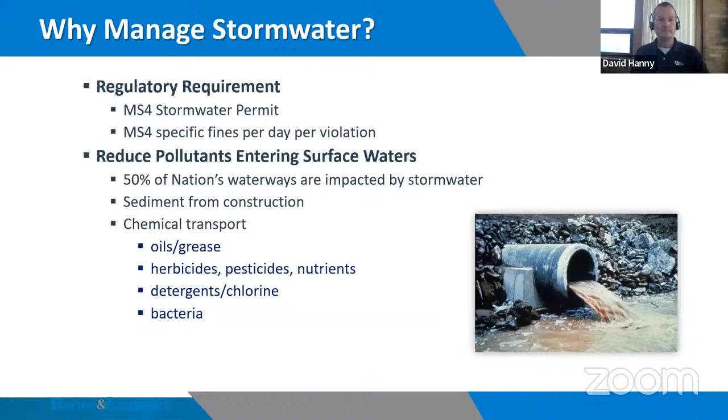So what I'm going to do over the course of the next 45 minutes or so is to give an overview of the MS4 permit and really focus on what's required today and how that's going to change once the draft MS4 permit is adopted. So we'll go over some of the current requirements and some of the new requirements that are going to affect

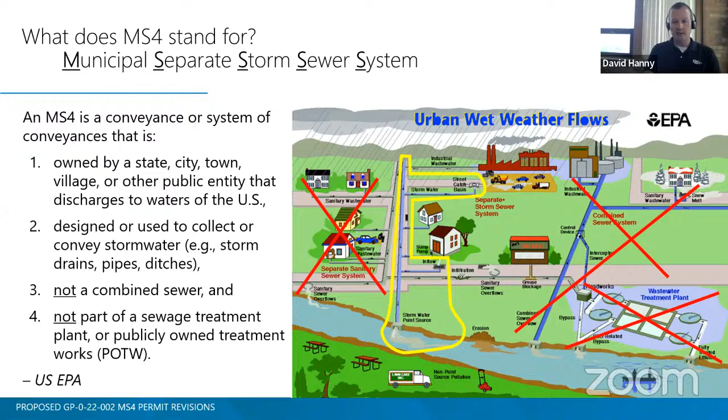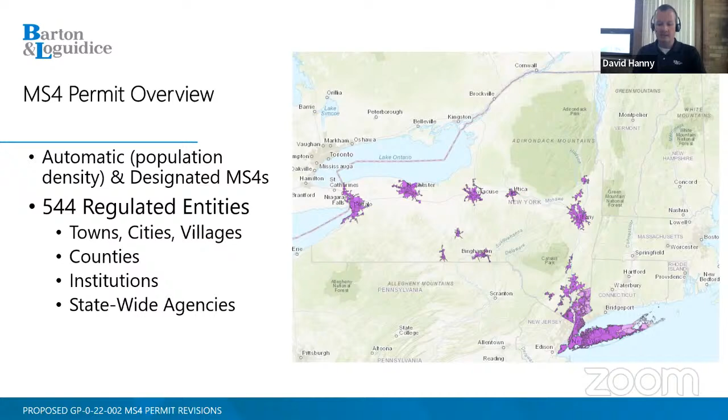So the MS4 permit covers urbanized areas throughout New York State. You can see the purple areas that it covers. So these are all the MS4 areas in New York State. There is one more in Watertown. This map wasn't updated yet by the DEC, but there is another urbanized area in Watertown. So all told, there are 544 regulated MS4s as of last count. They can be at the state level, county level, local level, city, towns, villages, institutions, agencies, for example, Thruway Authority or New York State Department of Transportation, that they can be regulated MS4s as well.

So focusing in on the Capital District, it covers cities, towns, villages, and the counties within Albany, Rensselaer, Saratoga, and Schenectady. So if you have any questions whether or not you are a regulated MS4, you can certainly reach out to myself or Martin, and we can confirm if the regulations apply to your municipality.

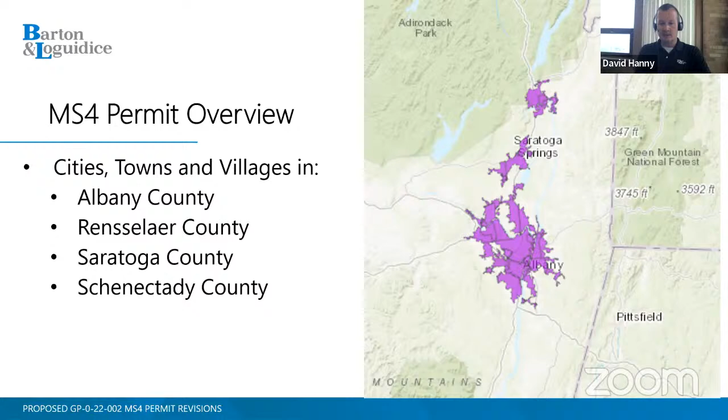So the real focus of this MS4 stormwater program is to develop a municipal stormwater management plan or municipal stormwater management program. And there's 6 key minimum control measures that go into the MS4 plan. So they include public education and outreach. So municipalities need to engage the public, educate them on the impacts of stormwater. They involve public involvement and participation. So under this control measure, we're looking to make opportunities for the public to get involved with the local stormwater program.

So every year, MS4s have to submit reports to the New York State Department of Environmental Conservation, documenting everything they've done in the past year for their stormwater program. Those reports need to be made available for public review, comment, participation. We also look to get the public involved with volunteer activities, anything from a stream cleanup to an Earth Day event. Just again, trying to get the public engaged and trying to be part of the process. The third minimum control measure is illicit discharge detection and elimination.

What that means is all the stormwater, whether it's from a pipe or a ditch, ultimately will lead to an outfall. And the outfall is the location where the stormwater discharges into a receiving water body. So part of the MS4 program is reviewing these outfalls, inspecting these outfalls to make sure that it's only stormwater

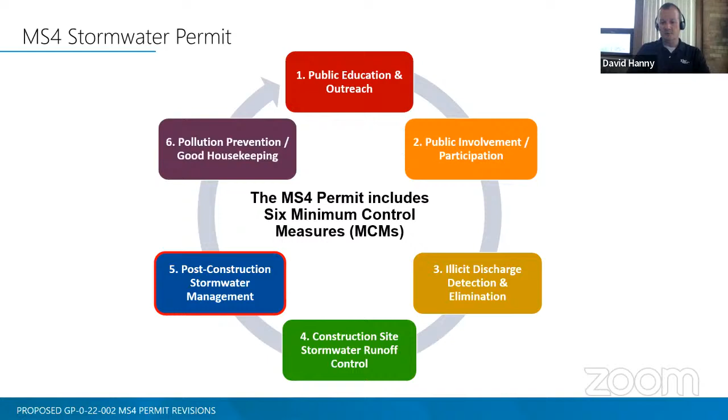And the final minimum control measure is pollution prevention and good housekeeping. Just making sure that all of the activities at municipal facilities aren't contributing potential pollutants to the stormwater system. So making sure that municipal highway garages, parks departments, have programs and policies in place so they're not negatively affecting stormwater runoff.

So it's just an overview, as Martin said in the introduction. It's been a while since we've had substantial revisions to the MS4 permit. It's been over 10 years. So we had a permit in 2010 that was challenged by environmental groups. There's been several litigations. It's been tied up in the courts for many years.

And then in 2015, we got the last MS4 permit that came out, and that's the permit that we're still adhering to today. There was a draft permit that came out in 2017, but due to the ongoing litigation, that was never finalized. So it's been several years since we've had a big update to the MS4 permit, and that's what I'm going to discuss today.

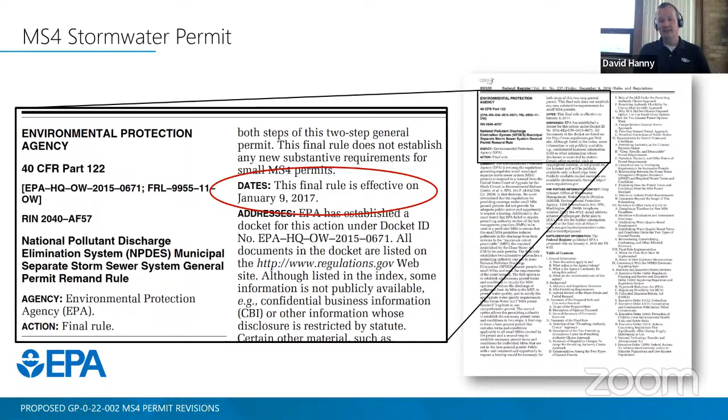So really the game changer that got us to where we are with this new draft MS4 permit at the state level was driven by a 2017 rule through the Environmental Protection Agency at the federal level, where they issued their new NPDES, their national MS4 permit. So that went into effect in 2017, and then that gets trickled down to all the states.

So I mentioned there's been ongoing litigation both at the federal level and the state level. Based on that litigation, in 2017, the US EPA issued their final Phase 2 rule. And that's kind of where we're all trying to get caught up to now in New York State.

So one of the big terms that came out of that 2017 federal rule is the maximum extent practicable. So under that, the MEP, MS4s must track information, analyze information, and adjust their stormwater management program. So it's really trying to comply with this new federal 2017 rule that has promulgated the changes to the current draft MS4 permit.

So I'm going to go through now and talk about all the changes that are going on with the draft permit. I'll preface this that if you don't like the changes, it's not me. I'm relaying the information in the regulations, and all of this is still subject to change. The draft permit was out for public review and comment.

That public review and comment period is closed. The permit was supposed to be issued in April. The effective date of the permit was listed as April 27th of this year. But it still has not yet been released.

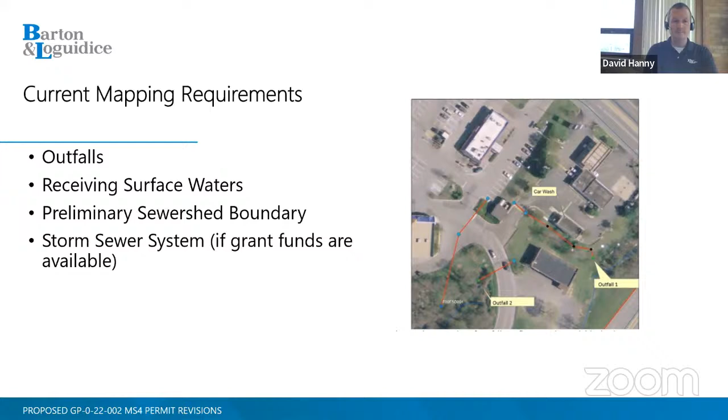As I go throughout the presentation, you're going to see a lot of references to EDP. And what that means is the effective date of the permit. So for the mapping requirements, they broke it out into 2 phases. So phase 1, within 3 years of the effective date of the permit, the MS4s are required to prioritize different monitoring locations for their outfalls, look at different focus areas. So focus area could be an area where you have heavy industrial usage, maybe a commercial corridor.

The MS4s are also required to map permanent stormwater management practices that they own. So if it's a municipally owned pond, that's required to be put on the mapping. And they're also required to identify their municipal facilities on the outfall maps. So your highway garages, your public works departments, your parks departments, all of those facilities are required to be put on the outfall map. And I'll talk more about those in a little bit.

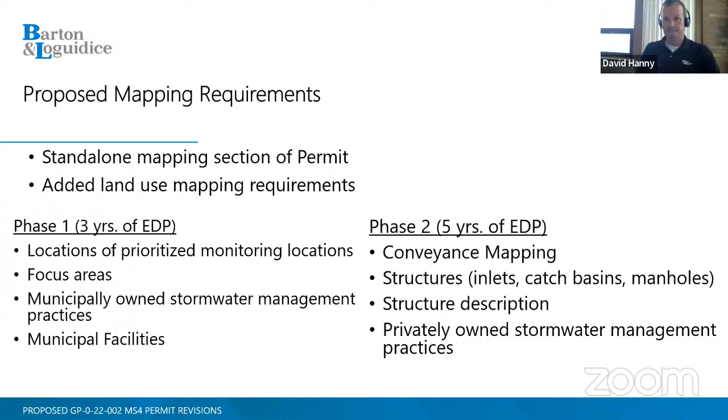Yeah, for a car wash, they would be required to discharge the process water into the sanitary system. Yes. Yep. Were there more questions up there? No, that was the only one so far.

But under the new regulations, a lot more mapping is going to be required. Again, all of the conveyances, whether it's pipe, open channel, size of those conveyances, catch basins, manholes, and even privately owned facilities and drainage structures that may not be owned by your MS4. So if you're a local MS4, a town, and if you have a county road or a state road running through your jurisdiction, you'd be required to show those locations as well.

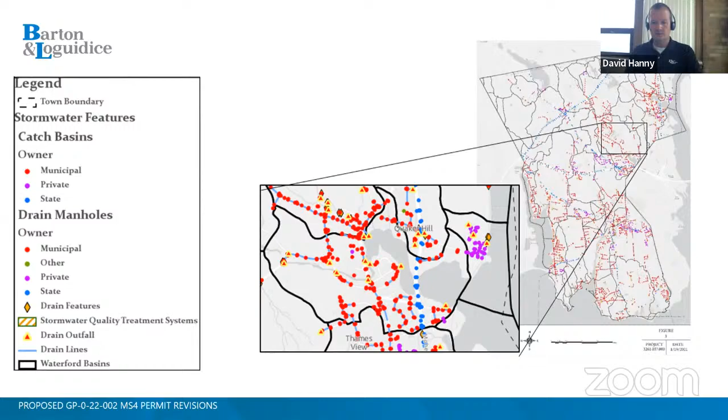Okay, so I'm going to get into minimum control measure 1 and really follow the same format. If any of you saw the DEC's webinar that they put out on the proposed changes, it follows a very similar format where I'm going to go through some of the current requirements and then the proposed new requirements. So minimum control measure 1 is public education and outreach. Under the current program, basically the MS4s are required to educate the public on pollutants, water bodies, and geographic areas of concern. And they're required to identify target audiences to educate the public.

So what was always a gray area under the current program is, how often do we do this? We can create flyers. We can put flyers or pamphlets in water bills and mail them out. We can have pamphlets at town hall or municipal buildings. But it's difficult to track, and it was difficult to gauge how often this outreach needed to occur.

So under the proposed regulations, within 3 years, the municipalities are required to identify focus areas. And these could be based on the watershed within your municipality. So some watersheds may have different impairments or different pollutants of concern. Some areas may be more prone to construction activities. Some areas may have streams that are running through them that are prone to erosion. Looking at areas that are on on-site wastewater treatment systems. So if you have an on-site wastewater treatment system, specific outreach would be required.

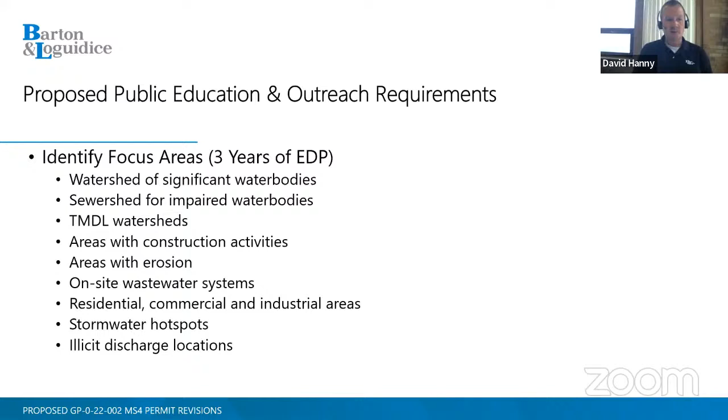Outreach is required for different residential components, commercial, industrial areas, stormwater hotspots, which could be a gas station or another type of operation that has high potential for stormwater contaminants. And also training is now required on illicit discharges. So the new program, again, requires different training for different audiences. So your training for residents is going to be different for commercial properties. It's going to be different for construction operators. It's going to be different for your municipal employees, but it really requires a much deeper, broader training to be developed. Again, I mentioned specific trainings required for illicit discharges.

And now we have a time frame. So education must be conducted to each of these different target audiences at least once per permit term. So we anticipate that it will likely be a 5-year permit. So you have to reach out, have to develop targeted information for each of these different audiences at least once during the permit.

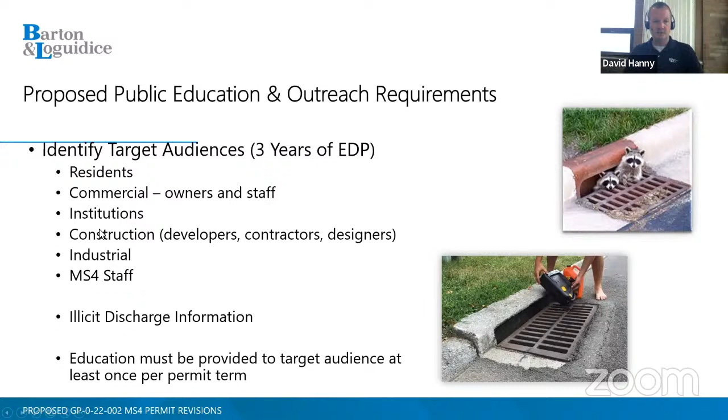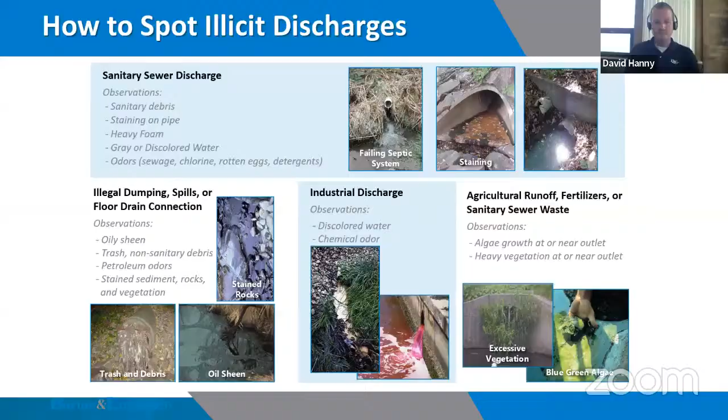All right, so we're going to jump to minimum control measure 2, public involvement and participation. Currently, there's not a whole lot required under the permit for this. Each municipality is required to have a local point of contact. So someone that the residents can call if they see a drainage issue, an erosion issue, if they see an illicit discharge. Municipalities also have to make their annual reports available for public review and comment, and the same with their stormwater management program plan. So typically the way this has been done is by postings on your municipal website.

So I just would ask everyone, if you are a regulated MS4, take a look at your website and see what information's on there. Ideally, it's going to have a link for your stormwater management program plan. It's going to have a link for all of your annual reports, hopefully some public education information, and some opportunities to get additional information as well, perhaps links to DEC websites or EPA websites.

So under the new permit, a few changes. There has to be an opportunity once a year to receive public comment on your stormwater management program. The other big change is, as most of you know, we're wrapping up the end of May here, and MS4 reports are due June 1st. I'm not sure if that reporting deadline will change under the new permit, but under the proposed permit, you have to seek public comments by May 1st of each year.

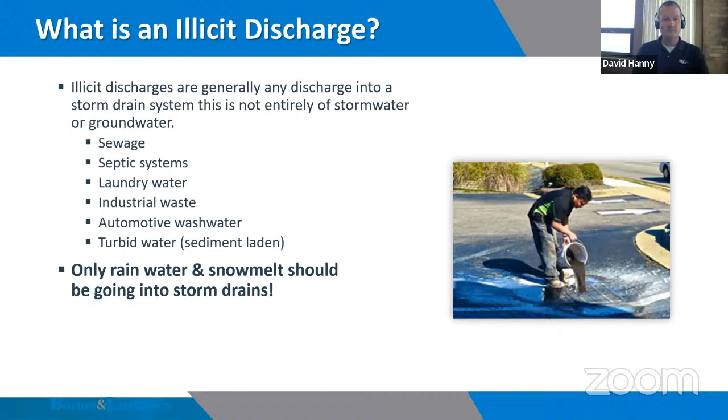So under the current program, you're required to inspect all of your outfalls at least once every 5 years. So typically you'd like to try to get 20% of your outfalls inspected each year. You also have to have a local law, assuming that you have the ability and authority to implement local laws. This isn't required at the county level. So towns, villages, cities have to have a local law that prevents illicit discharges.

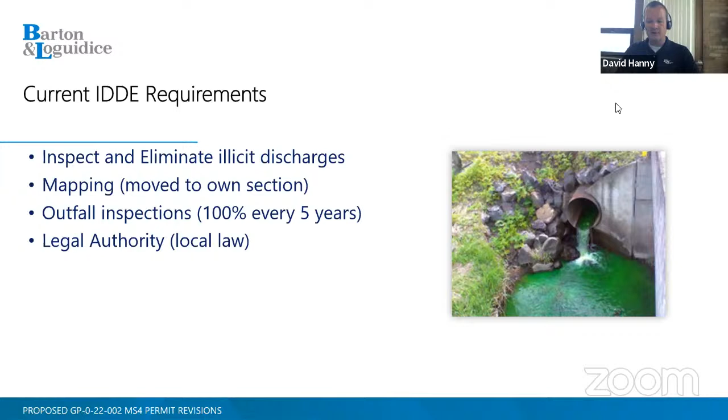So under the new requirements, you're required to map more than just the outfalls. You're required to map any connections to another MS4. You're also required to map all of the discharges from your municipal facilities to your MS4 drainage system. So just to go a little deeper on that, right now under the current permit, you would just have to map the outfall location, the location at the end of the pipe or the ditch that drains to a surface water.

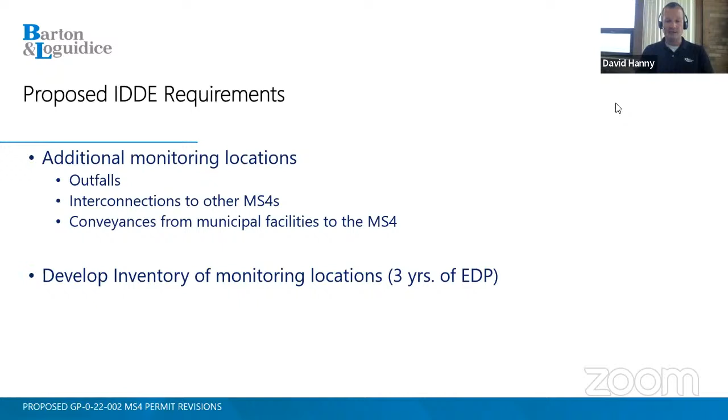But now under the new program, if you have a municipal facility, if it's a public works facility, where the drainage off that public works facility enters the rest of the drainage system, not just the outfall, those locations need to be mapped. And then based on those locations, each municipality is required to develop an inventory of monitoring locations. So it could be monitoring more than just the end of pipe. It could be monitoring those connections where your municipal operations drain into the rest of the drainage system.

So one of the keys here, you're going to see this a couple times as we move forward, are these priority rankings. So under minimum control measure 3 for the illicit discharges, you're required to rank your outfalls either as a high priority outfall or a low priority outfall. So a high priority outfall receives drainage from a high priority municipal facility, which could be any municipal facility that has petroleum bulk storage, salt storage,

does fleet fueling, does maintenance on equipment. That would be considered a high priority municipal facility. So if you have discharge from one of those facilities that goes to an outfall, that would turn that into a high priority outfall. Other ways you get into a high priority outfall is if that location discharges to an impaired water, a TMDL water, or high priority water.

So basically, if you're going to either an impaired or a very high priority clean water, that would put you in the high priority outfall status. And if there's been 3 or more citizen complaints, so again, you have to have a community hotline, you have to have a municipal point of contact. If there's been 3 or more complaints at a certain outfall location, that would automatically elevate that outfall location to a high priority point.

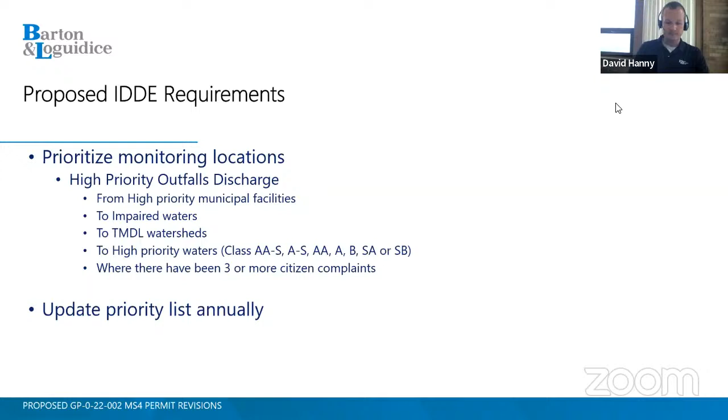So what does that mean? Under today's permit, you would have to just monitor an outfall once per permit term. But if you're a high priority outfall, those have to be monitored and inspected at least twice per permit term. The low priority outfalls stay where they are today, just once per permit term.

There's some other changes. Typically, when you do these outfall inspections by the permit, you're required to do them during dry weather. So you don't want to be doing the outfall inspections when it's raining. The purpose for that is if you're out there during dry weather and there's flow coming out of a pipe or a ditch, that could really indicate a potential illicit discharge. It could be a cross connection from a sanitary sewer. It could be a connection from a floor drain. So that's why you're required to do it during dry weather.

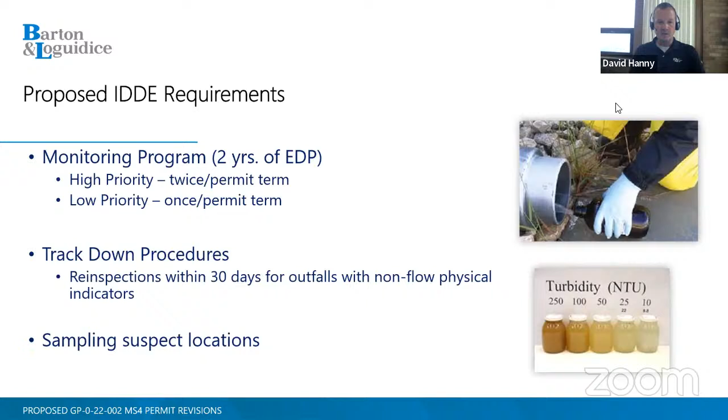So if you go to an outfall and there's no flow, but there's indicators of potential contamination at the end of pipe, you're required to re-inspect that within 30 days. So I'm just going to walk through some of the inspection requirements. These inspection forms are contained in Appendix D of the draft permit. There's a lot of good information there. But this is the type of detail that you're required to document.

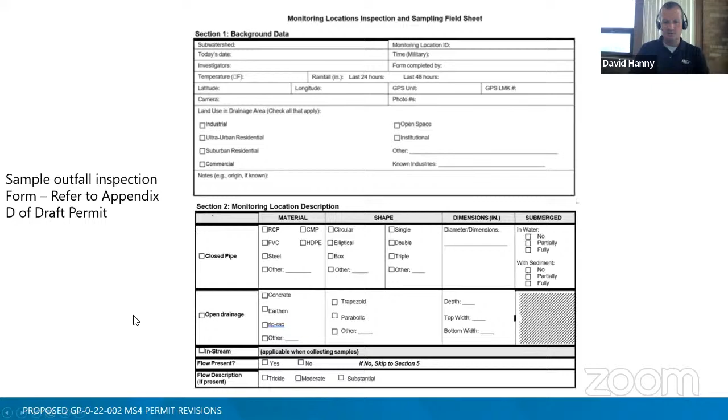So it's not just the outfall location. It's the construction of the pipe, whether it's concrete, steel, CMP, HDPE, the characteristics of the drainage swales. If there's flow coming through the pipe, you need to record that, measure that. And here's really the key for outfalls that are flowing: is there odor, color, turbidity, floatables? That could indicate an illicit discharge.

Under the new permit, for non-flowing outfalls, if you have an outfall that's not flowing, but you see damage to it, or staining or high weed growth, you're required to go back and do a reinspection within 30 days. And finally on the outfall form is a summary of whether or not you saw signs of an illicit discharge, and this could lead you into actually doing some benchmark testing for water quality.

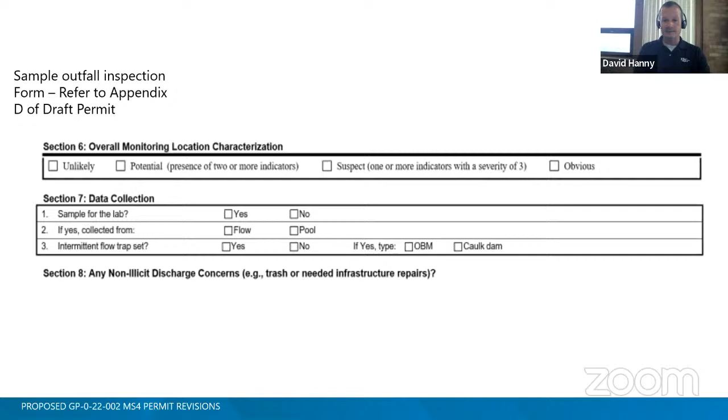Hey, David, we had a question from one of the attendees about the effectiveness of winter inspections. Do you find the communities you work with are getting good information or usable data if they're conducting winter inspections at their outfalls or their facilities for that matter?

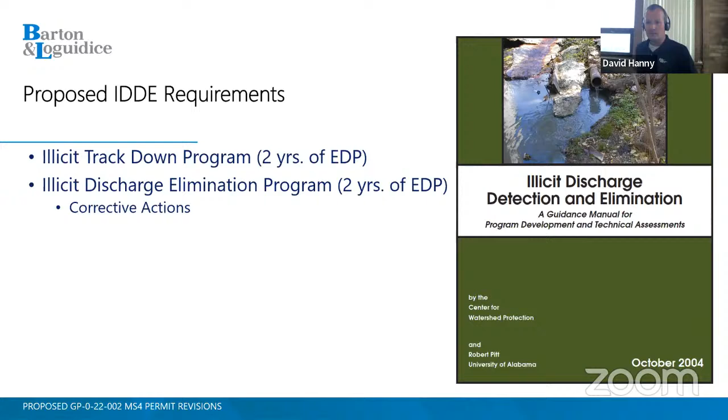Yeah, I would think less so. Typically we do our inspections either early spring or late fall. The reason is the outfalls are just easier to get to before things grow up. All these outfalls drain into a water body, so they all have excessive vegetation. It's much easier to see the discharge. So we haven't done many inspections in the winter. We typically focus on spring and fall. Thanks.

All right, we're going to shift to control measure 4. Again, this deals with runoff from construction activities. So under today's permit, MS4s must have a local law in place dealing with erosion and sediment control. They must have a process to review stormwater plans. So if a site plan comes in for your planning board review, depending on if that site disturbs over an acre, they're required to have a stormwater pollution prevention plan. So municipalities have to review and sign off on those stormwater plans.

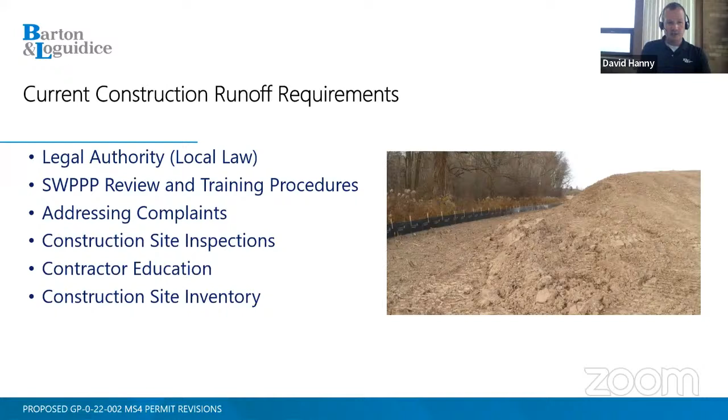There's also requirements for addressing complaints, doing construction site inspections, and that was also another real gray area. So under the current permit, the MS4 is supposed to be doing inspections of construction activities, but there was never a real strong indication of how many, the frequency, how often, when should you do these inspections. So that's changed under the new permit. There's also requirements for educating contractors and to have an inventory of construction sites within your community.

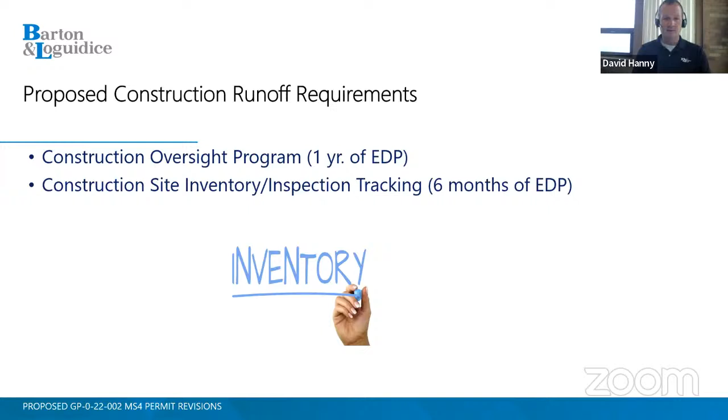So under the new program, you have to develop a comprehensive oversight program, which really outlines how you're going to oversee the construction activities within your MS4. You also have to develop a detailed site inventory and inspection tracking mechanism. So again, I mentioned the priorities, so that comes into play again here. So based on the type of construction activity in your municipality, where it's located, is going to dictate how often you have to inspect it.

So a high priority construction site is going to discharge again to a threatened water body that's on the New York State DEC's 303(d) list, or to trout spawning or trout waters. If the construction activity is close to a pond or a stream, you can see the buffer requirements there. That amps the inspection requirements up. If you're disturbing more than an acre of soil on a soil slope phase of D, E, or F, which are basically your steeper slopes, that's going to increase their frequency. And if you are disturbing 1 or more acres with a high erosion risk, that's going to increase the inspection frequency.

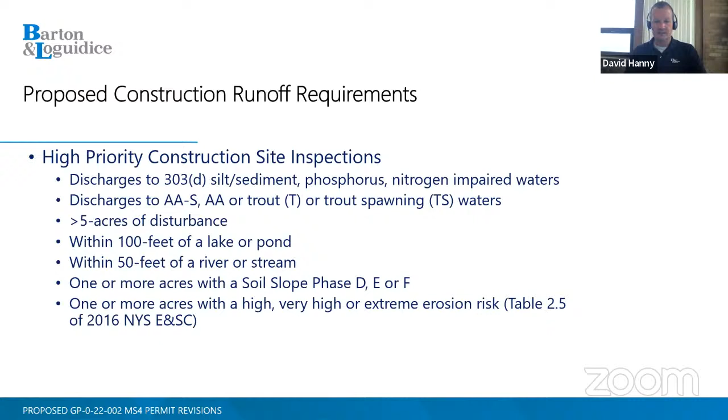So here's the requirements for a high priority construction site. The MS4 operator is required to inspect that at least once a month. So every 30 days, someone from the municipality has to go out, has to oversee the construction activities, make sure that the construction are following their stormwater plan, making sure that they're doing their weekly inspections. A lot of times, municipalities require construction site operators and inspectors to send them their reports. So typically these reports are being done once a week. If you're disturbing more than 5 acres, they have to be done twice a week.

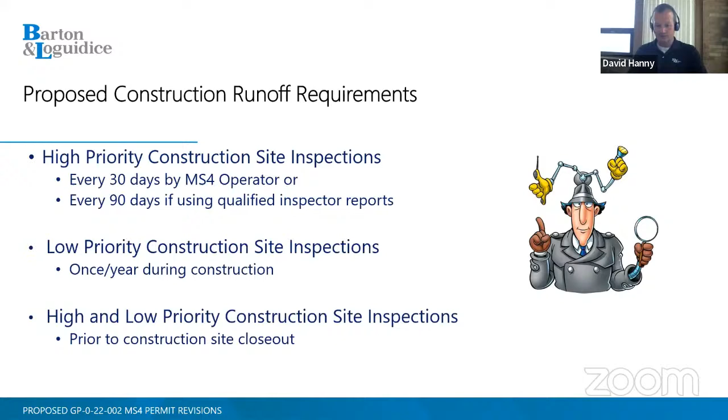So if MS4s are relying on others' reports and they're reviewing them, then the frequency for high priority construction inspections goes down to every 90 days. So lower priority construction site inspections, just once a year. That's it. So that's been defined. But for both high and low priority inspections, the MS4s must do a final inspection before the site is closed out, before the notice of termination is submitted to close out the construction permit.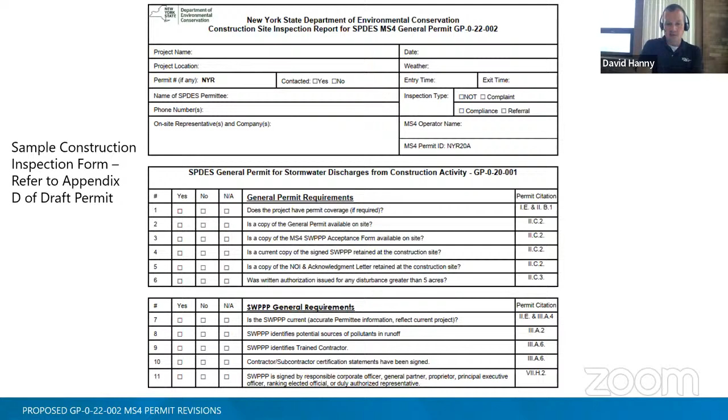So I'm not going to spend a lot of time on these, but again, really good forms in Appendix D of the draft permit. So these are an example of the inspection forms that an MS4 would be completing for a construction activity within their jurisdiction. So looking just to make sure that the construction operator has a SWPPP, making sure that it's been signed, making sure that the SWPPP is up to date, all the inspector requirements are in place, making sure that the record keeping is done, again, making sure that the inspections are done at least once a week.

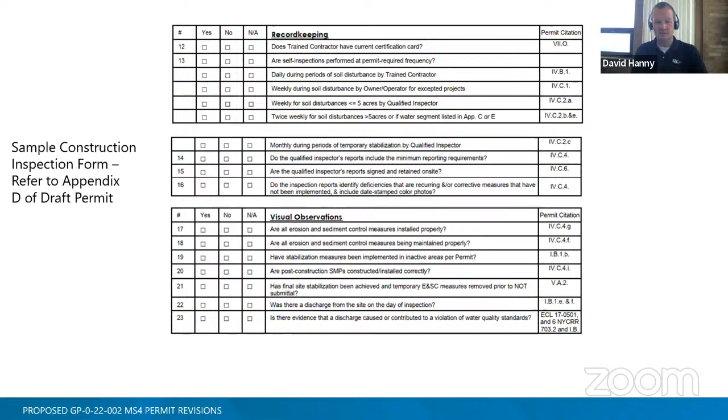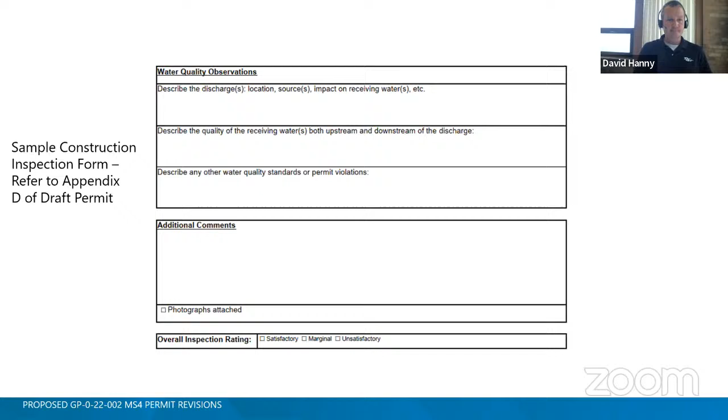And then looking at visual observations, signs for erosion, making sure your BMPs, whether it's silt fence or other practices, are being maintained and properly installed. And then looking at any water quality issues that might be coming off the construction site. There's also some training requirements. So the folks that are doing the MS4 inspections are required to have a 2-hour MS4 inspection training once per permit term. And they're also required to get that 4-hour training from the New York State DEC in erosion and sediment control at least once every 3 years.

And there's also a requirement to have a pre-construction meeting. So that's a meeting where you would get the MS4 operator, the owner of the development, the contractor, and whoever's doing the inspections on behalf of the owner to have a meeting before construction starts. So that's a new requirement.

All right, minimum control measure 5, post-construction. So this is looking at all of our practices that have been built with the new construction or redevelopment project. So again, your stormwater ponds, wetlands, bioretention areas, rain gardens, porous pavements, any of the practices that were built to address water quantity and quality.

So under the current permit, again, local law is required to mandate these things. There's a review process, as I mentioned earlier, for new site plan applicants. They have to have a signed SWPPP. The SWPPP has to be reviewed by the MS4, and the MS4 is required to just have an inventory of the post-construction practices that they own and operate.

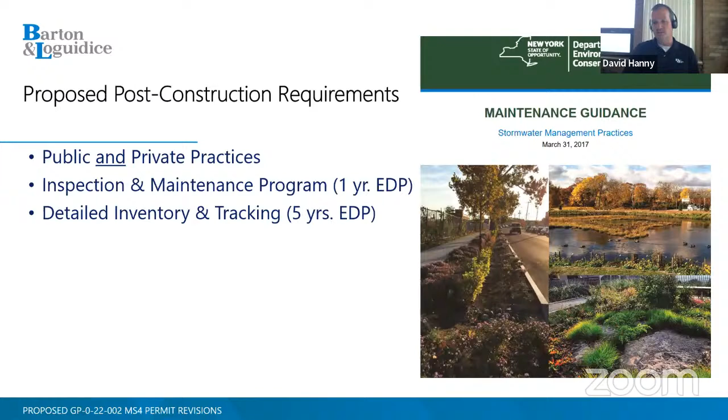So I'll refer you to the guidance document on the right-hand side of the screen here. This is a DEC maintenance manual. So this maintenance manual, it's a really good visual reference. It breaks down many different stormwater practices, not just ponds, wetlands, but all the green infrastructure practices. And it's a guidance for how, when, and where to inspect these practices.

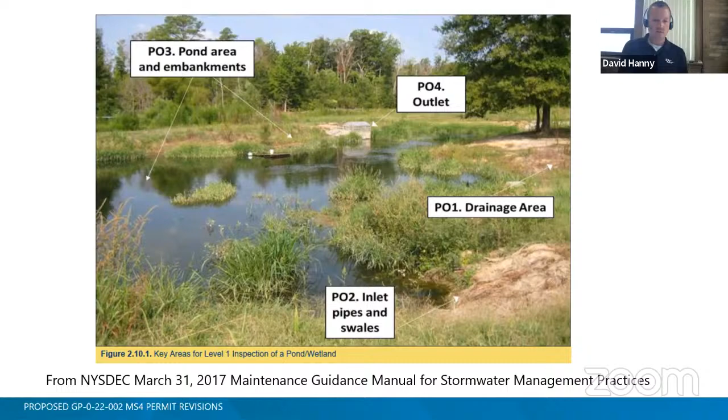So these are just a couple examples out of the manual. This is looking at a pond. So these are the typical areas that you would inspect: the embankments of the pond, the inlets, the outlets, drainage areas, the depth of the pond, how much vegetation's in the pond. This manual also outlines how often you should do the inspections. So if it's once a year, once every 2-3 years, and they're all going to vary depending on the practice.

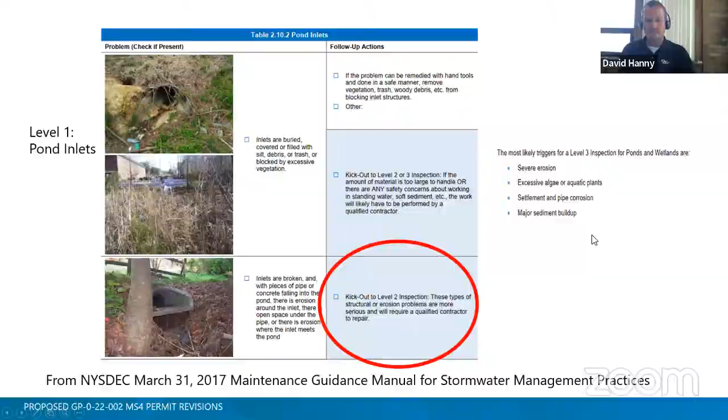David, I got a $1 million question for you. Do you recommend, or perhaps you have some guidance, that municipalities take over stormwater structures? And what's the typical maintenance cost? I can think of a dozen examples around the table when communities discuss BMPs or enforcement issues related to stormwater ponds. And that's a constant tug of war over whether you want the stormwater pond as a municipality or whether you want to continue to have that pond owned by the homeowners association. In your view, put you on the hot seat here, what types of relationships work best to ensure maximum compliance for minimum cost?

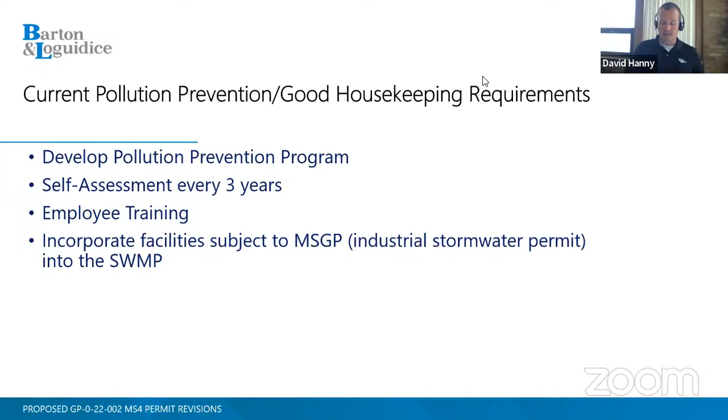Okay, come right in. Hold on. Sure. We'll ask you another while we're in the zone.

Question: if your community is not following MS4, you are... It says, what are you? It's like a Jeopardy question. You are unregulated, but there are still some requirements placed upon you for managing construction sites.

Yeah, if you're not an MS4, typically managing the construction sites would fall back to the state. There could still be other local laws, ordinances in place that pick up some of these requirements. But if you're not a regulated MS4, oftentimes, the inspections fall back to the state. Yep.

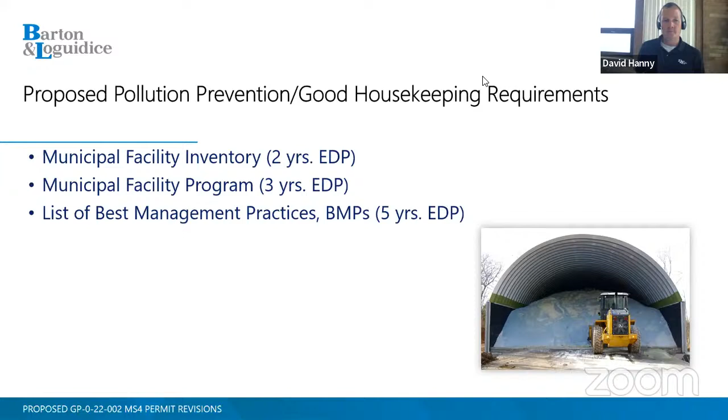Okay, so back to pollution prevention, good housekeeping. Again, more plans are required, more inventories are required. And we're going to get back into our high priority, low priority distinctions. So a high priority municipal facility is anyone that has bulk storage of chemicals, your salt storage facilities, petroleum, gas, diesel, pesticides, fertilizers, antifreeze, lead acid batteries, tires. So just that definition tunes you into public works facilities, highway garages, anyone that's doing vehicle maintenance.

So those are all put into the high priority caption. And this is probably, in my mind, one of the biggest and probably most costly ways to implement the new permit, because these sites are now going to be required to have a site-specific stormwater pollution prevention plan. So they're going to have to have a standalone document that identifies all the pollutants that could be running off the site. They're going to have drainage mapping, outfall mapping, and there's new assessment requirements.

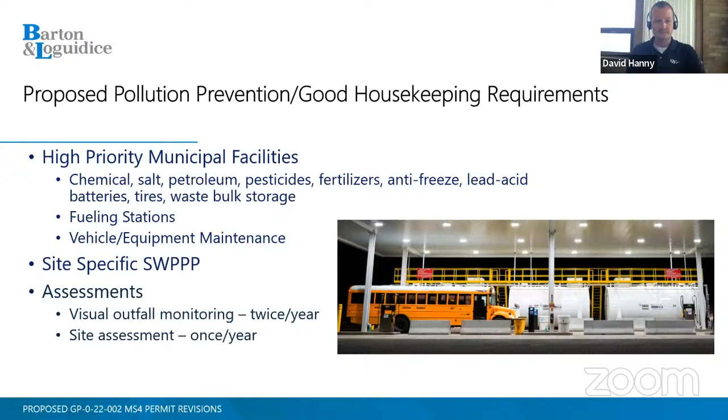So for any of these high priority sites, you have to do screening of your outfall locations twice a year, and you have to do a site assessment once per year. So this is just an example of a screening form, again, twice a year for the high priority sites. This is where you actually go out, you collect a beaker of water coming off that site, and you screen it for potential contaminants. The assessment forms, these are required once a year for the high priority facilities.

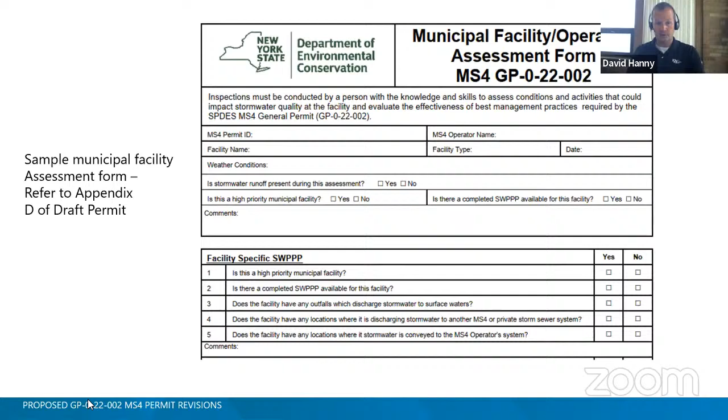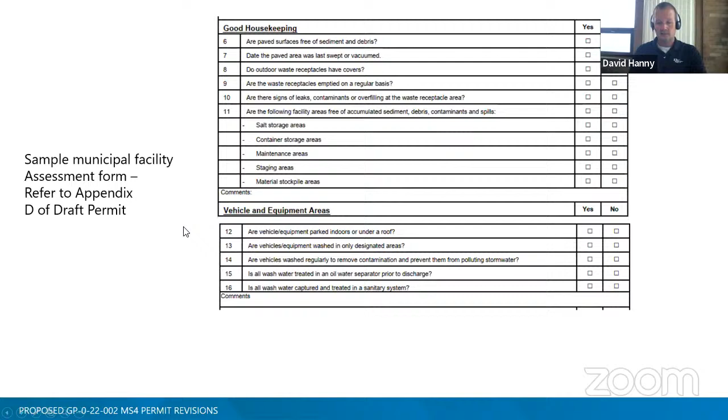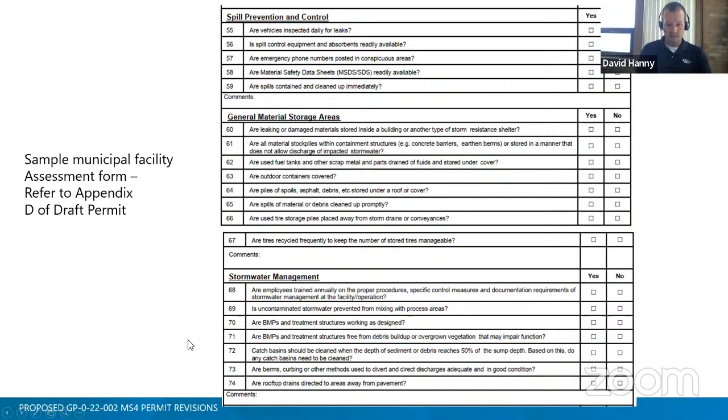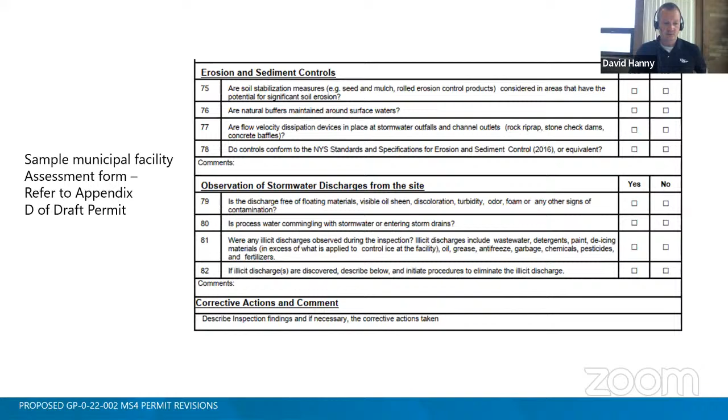Again, making sure that they have a facility specific stormwater plan. And then just big checklists, looking at their good housekeeping practices, their vehicle and equipment maintenance areas, fuel areas, salt storage areas, fluids management, battery management, spill prevention control, your material storage areas, stormwater management areas. So you can see it's a pretty hefty checklist. We're down to line 74 here on it. And it continues, looking at potential discharges from the site, erosion and sediment control. So this will have to be done once a year at those high priority facilities.

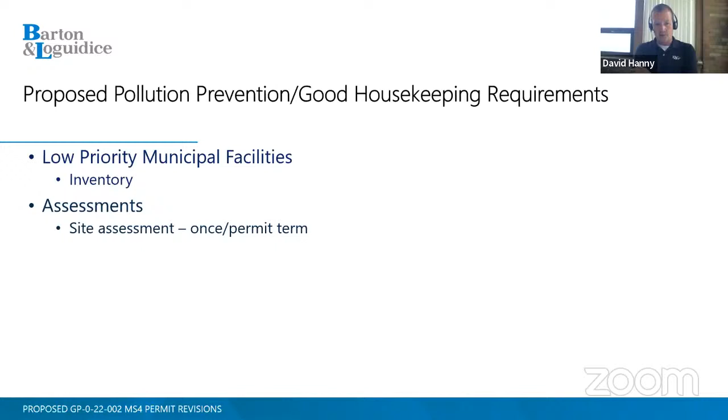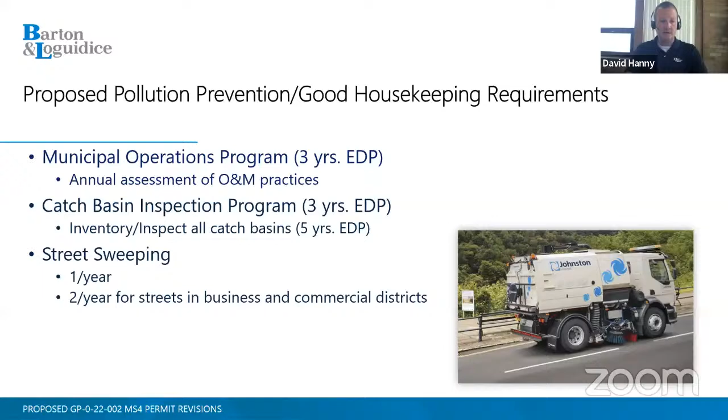Low priority facilities, once a permit term. So typically once every 5 years, you'd have to do that assessment. And there's no visual monitoring. Again, the high priority ones, you have to look at the discharges twice a year. Also under pollution prevention, good housekeeping, there's new requirements for catch basin inspections. They all have to be inventoried and inspected. New requirements for street sweeping. So once a year is now mandated, twice a year if you're in a commercial or business district.

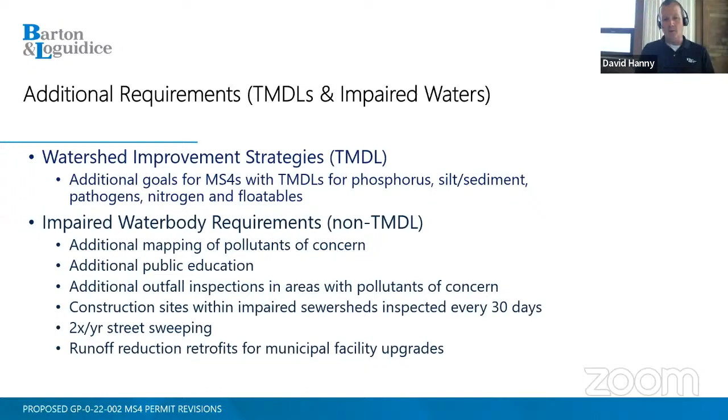All right, I know we're getting to the top of the hour here, so just going to wrap up. I'm not going to spend a lot of time on this, but the take home message here is if you discharge to a TMDL, which is a total maximum daily load watershed, or an impaired water body, the requirements for everything I just talked about, those 6 minimum control measures, they all go up. So this is the mapping for the Capital District. So again, purple are your MS4 areas. Fortunately, you don't have any TMDLs in the Capital District. There's no watershed improvement strategies in the Capital District, but there are some 303(d) water bodies.

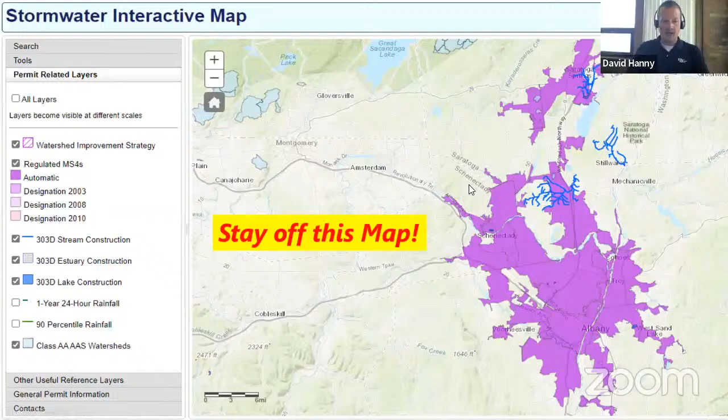So if you're a municipality that discharges to one of these, and here you are, there's going to be heightened requirements. So again, think about what this whole program is meant to do. This whole program is meant to try to clean up our waters. So if there's anything you take away from today, do everything we've talked about, do your best management practices, your training, and stay off this map. You don't want to have impaired water bodies. You don't want to have TMDLs within your municipality. So within the Capital District, extended a bit, those are just the current list of impaired waters. So again, if you're a municipality that discharges to one of these, you're going to have some increased requirements.

So there's a lot more information. I highly urge you, if you're a regulated MS4, to check out the DEC's website. The draft permit's on there. There's a really good fact sheet on there. They did a webinar that they recorded and put on there. So a lot of good information is there.

I know everyone's going to ask, when's this thing coming? Again, the effective date was April 27th. We're past that. I'm expecting that once we get past the June 1st MS4 reporting deadline, we might be looking to see a final permit, but I've learned I'm not going to commit any timing to it.